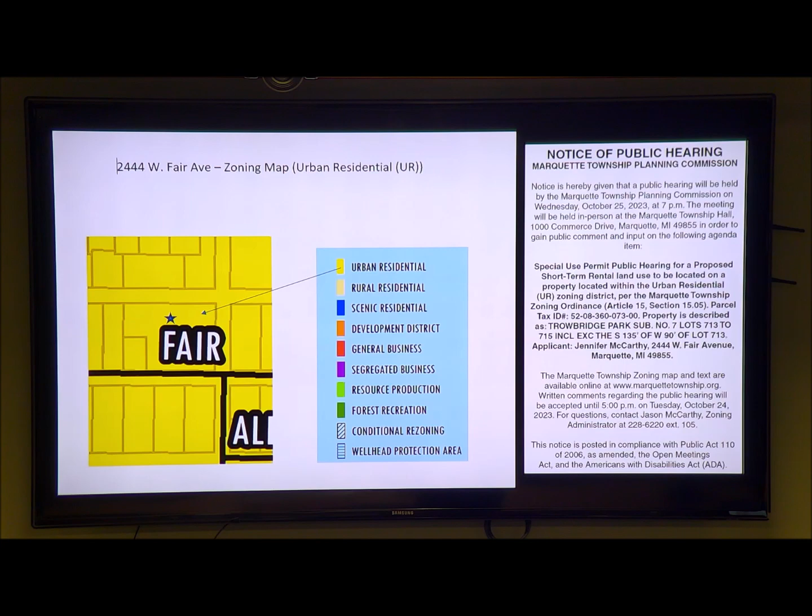And 11 in the area we're considering, is that correct? Well, that's within the entire - right, because some of these out on 550, obviously, we're not considering those. We're just considering the 11 that are in this general area, yes sir. And if you were to compare it to the city's requirements, you know, there's none on that block. Not that we have density requirements for them at this time. And there's only one other one on Fair Ave to the west.

No other questions? We'll open up the public hearing at 7:16. Anyone wishing to speak, please come forward. Seeing none, we'll close the public hearing at 7:17.

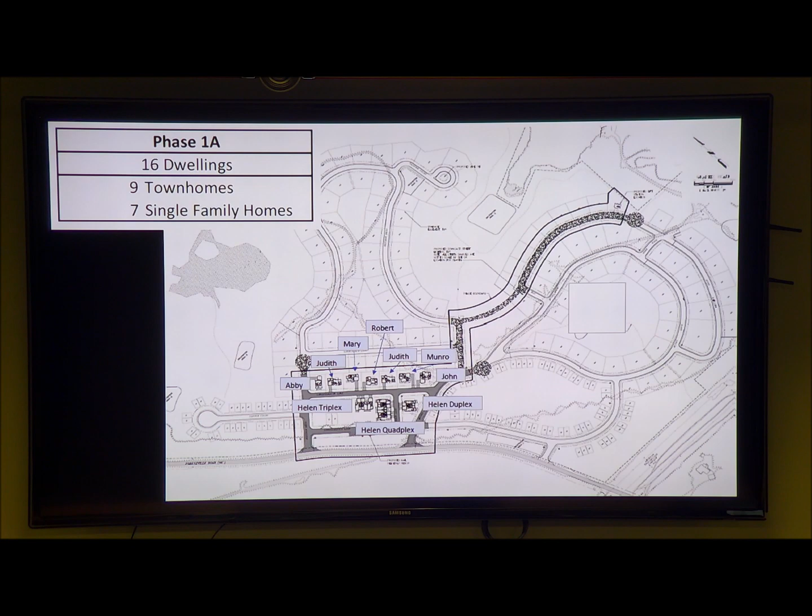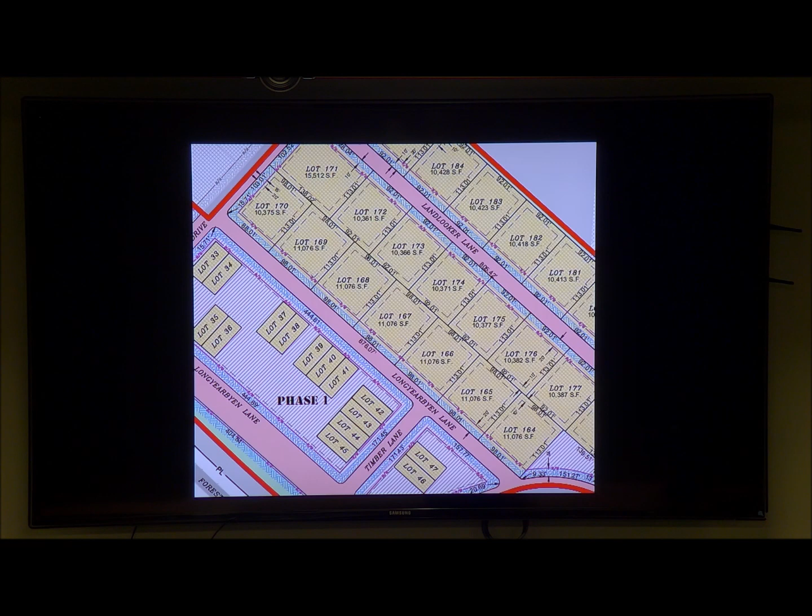So this is the area, if you planning commissioners look at their plan or their plan sheets, and you received quite a bit of information. I didn't include all the, I will say, boring stuff for you to consider—utility details, lift station design. I didn't include that. Those are required by state law to meet a certain standard, and I didn't feel it was pertinent to this discussion tonight. Tonight's more about height and bulk, zoning, traffic, etc. So this is the area that we're looking at.

This is the Abby site plan. Some of these lots that were initially shown to you in the preliminary actually got a little bit larger, and you can see they meet setback requirements for an urban zoning district.

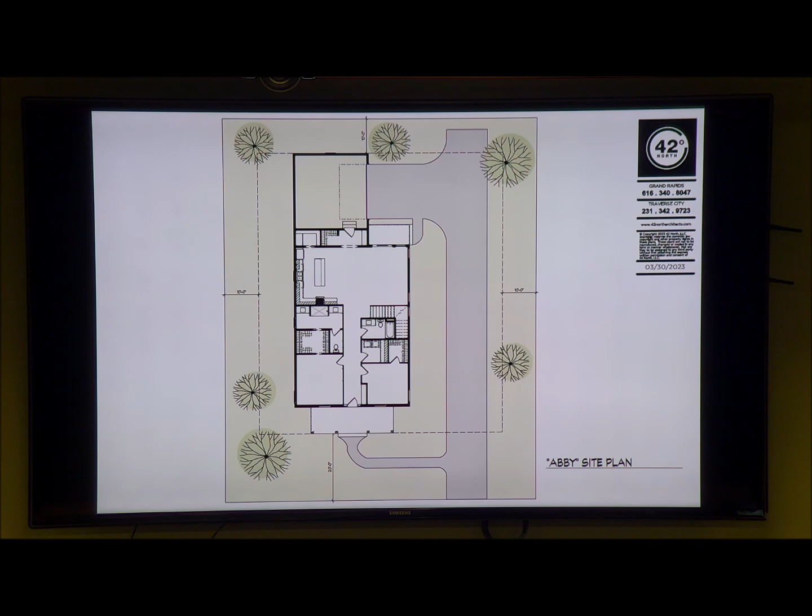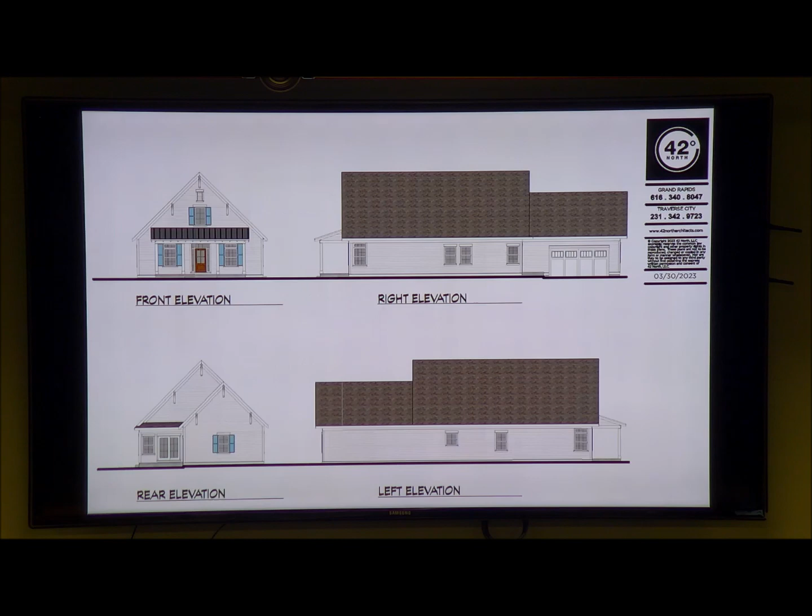Here's the floor plan and a quick elevation, so this is the style and quality being proposed. Is that the 1,500 square foot unit? No, that's about 1,600 to 1,700. It's our smallest single family home.

Would you like to talk about the next one? Sure, come up to the podium. Alyssa Arwood, Longyear. So the first one we saw was the Abby, our smallest single-family home. This one is the Helen, a duplex style.

This is 1,500 square feet on the first floor. Everything is single-story, but with optional basements where they apply and where you can build them. The Helen can be a duplex, a triplex, or a fourplex.

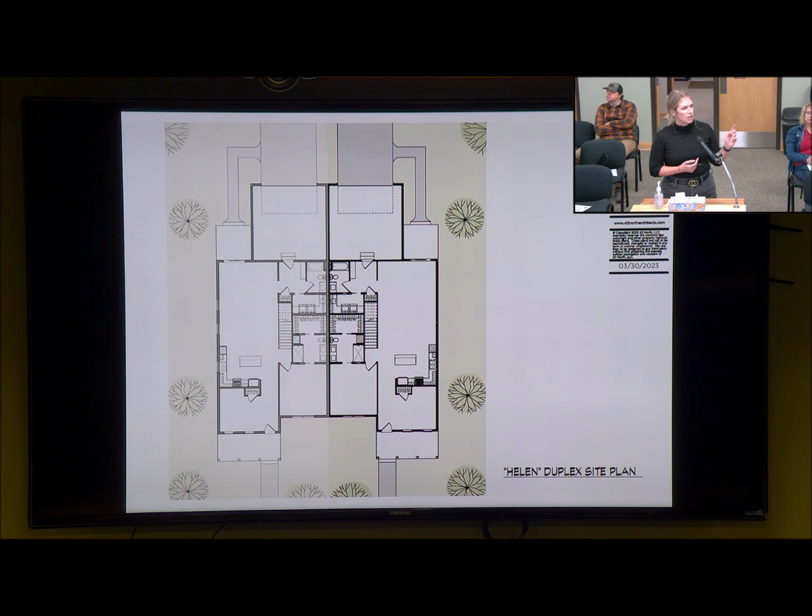There are alternate options too. Each of the home designs will have different things that people can do to customize them a bit. For this one, you could add on a second bedroom or leave it more open with just an office space or something like that.

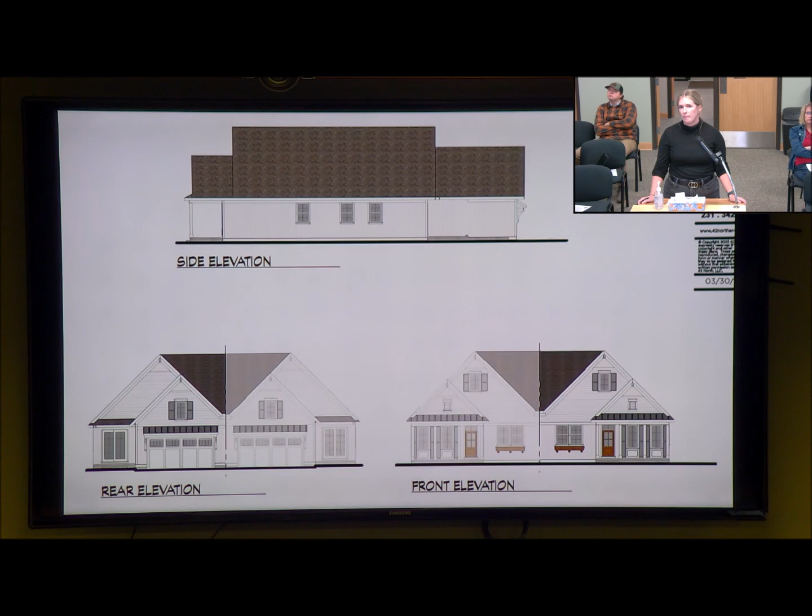And this is the duplex variety elevation.

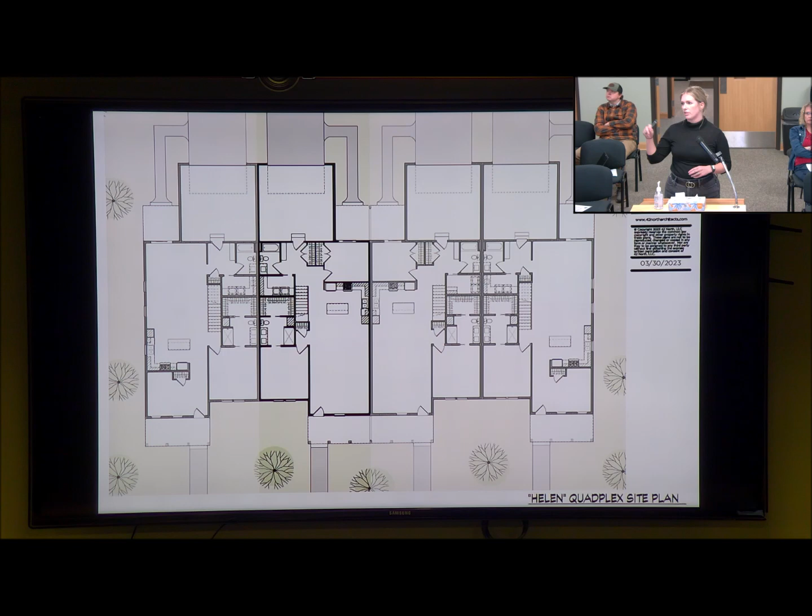And the Helen, again, is a quadplex, so they can butterfly one another. You've got all your garages on one side, and your formal entry where guests come in on the other side. So the side with the garages actually faces the street, so we tried to design them to be attractive on the backside too. They don't really change, you can do as many of them as you want, or butterfly them, but that's the elevation.

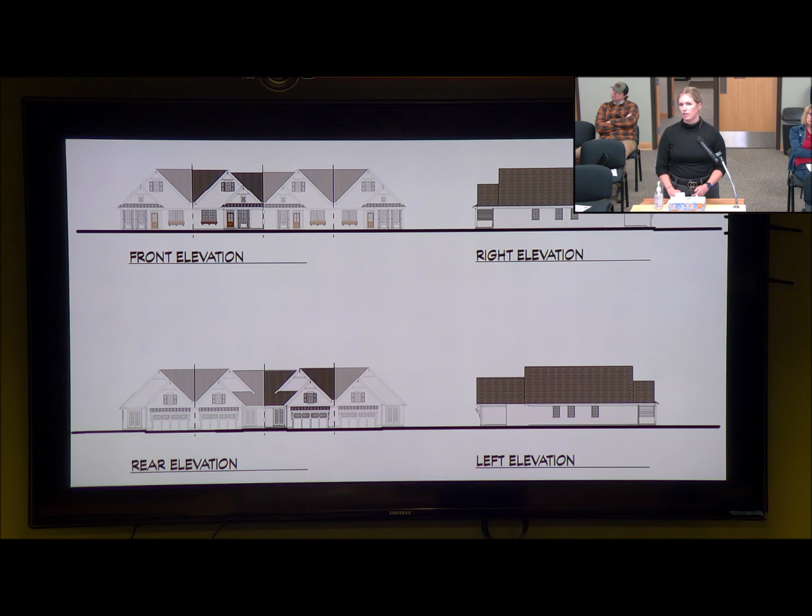These are all single-family homes moving from here. This is the John, and I apologize, I can't remember the square footages off the top of my head, but they go from about 1,700 square feet up to around 2,100 square feet for the biggest one. Again, you can do an office or change some things if you want to. They all have 2-car garages.

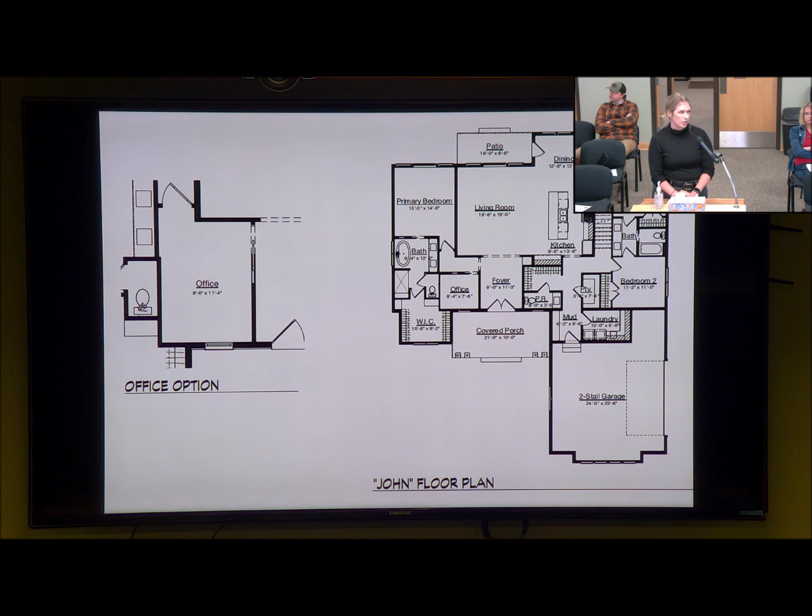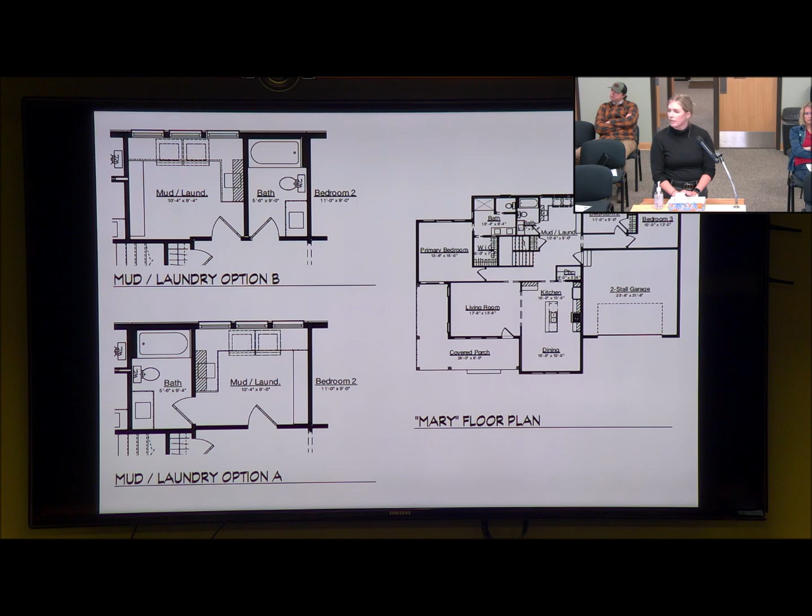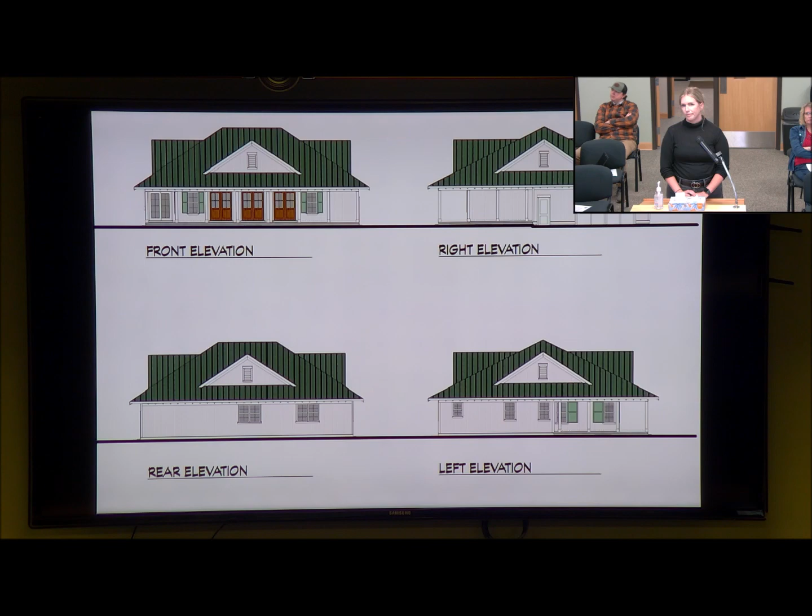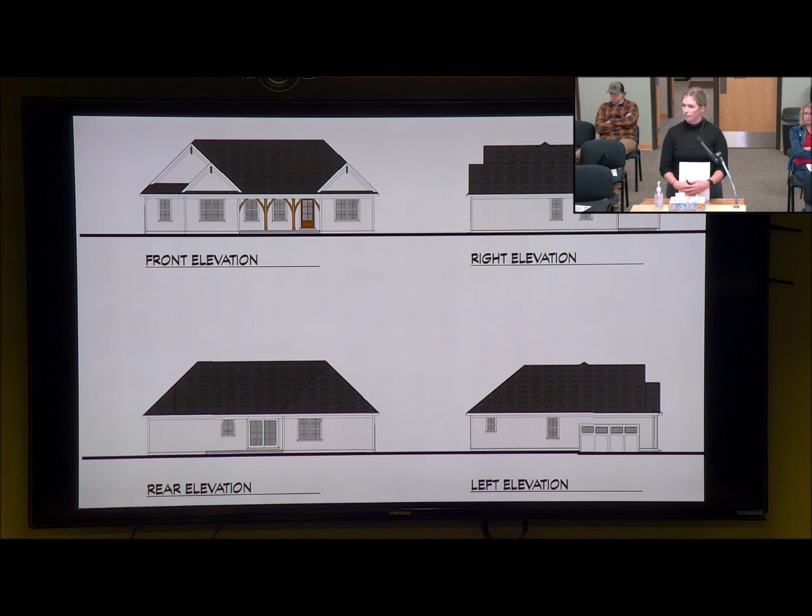And then the Judith, I think this is actually our largest one. So a variety, yep, and customizable. So you get a taste of the fit and finish style of what they're proposing to do here.

We're reviewing this evening because the only thing the Planning Commission gave approval for would be 16 dwelling units. These are your single-family homes, 1 through 7, and the first iterations we looked at were either a townhome, a quad, or a duplex, situated closer to Forestville Road.

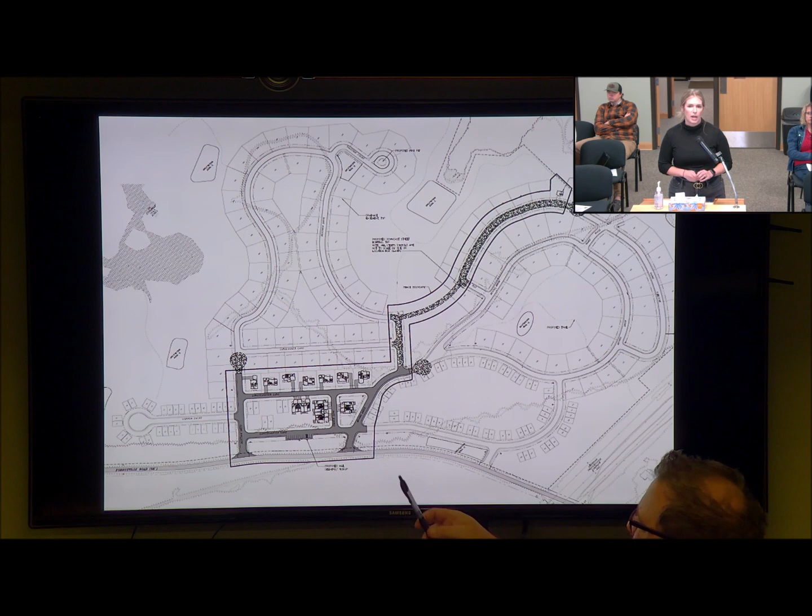These are the streets that would be created. Some, I guess, just guest parking, trail access parking, and trail access mailboxes. Okay, so out of the 240 some homes that were proposed, and what the Planning Commission initially commented on as far as the PUD they reviewed, we're looking at this right now.

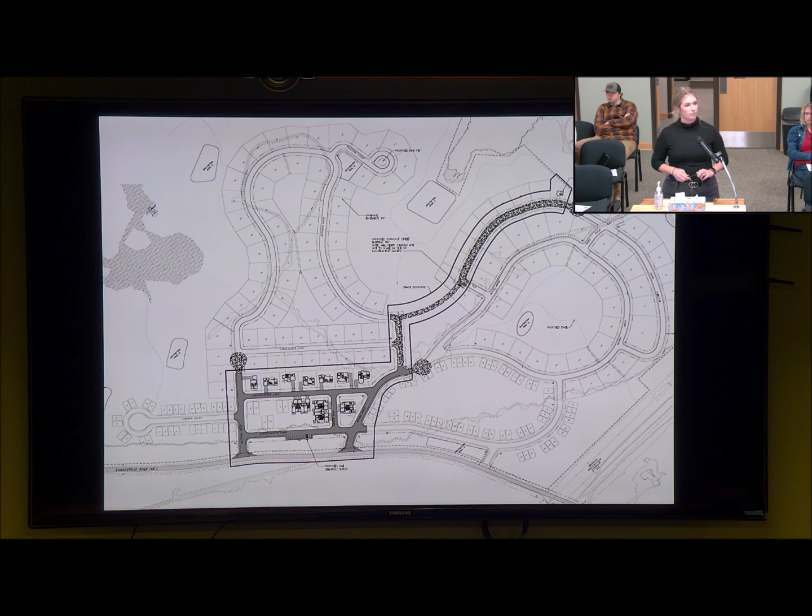Strictly that, yes sir. And that's all we're going to approve tonight is this. Well, you're contemplating it, whether you approve it or not, that's up to you. If it were to be approved, it is that and only that. Correct. And then to back up and talk about the road commission's correspondence to me and my reaching out to them...

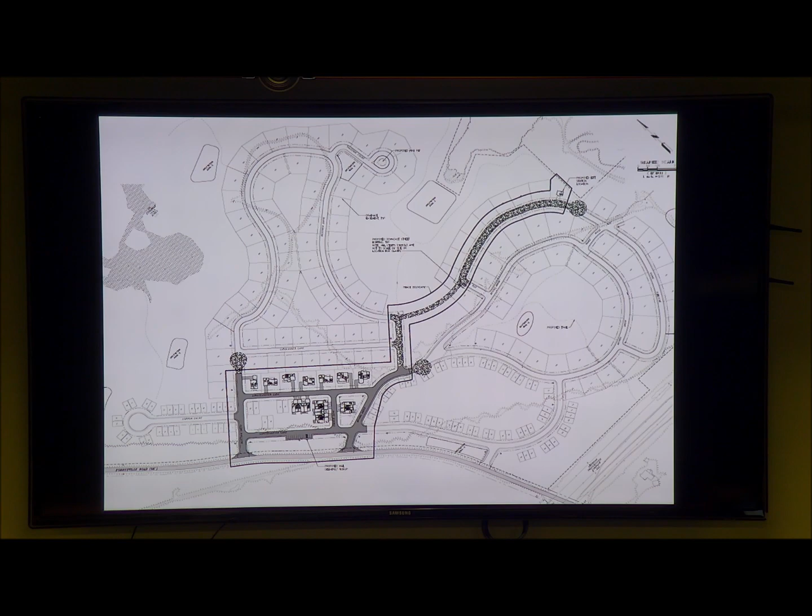We are not traffic engineers, we do not control the roads in the township. We rely on the road commission, their engineers, and their experts to provide us with any thresholds they see fit, among a number of things that Longyear needs to meet. The road commission correspondence referenced by the gentleman indicated that the intersection would not support the PUD as proposed. We are not approving what was initially proposed, which is 240 units.

This is scaled back significantly in an effort to allow some residential development to occur, but also to allow time for staff, the road commission, and our other partners to work on a permanent solution or alternative access to this development, prior to allowing it to reach what the initial PUD suggested. I think 100 units is going to take them 10 years to absorb, if not more.

Interest rates are high. There's a number of factors that are involved that we contemplate. However, the Planning Commission approved Phase 1A. That's what this is tonight. That's the only thing that they're looking at.

Each phase, as the ordinance addresses, every time Longyear wants to add additional structures or dwellings, they have to come back before the planning commission. That means you guys have the opportunity to come and speak again, or to see what kind of progress the township has made with the road commission and their requirements to address the intersection, since they own the roads. So I'll just say that.

Moving on, this is the utility layout that's proposed. This is within the site. We'll get to the required road information, or the utilities along the road too. But this just shows, and it's kind of hard to see on here honestly, but that's why I gave you guys large sets of plans to review. Basically water and sewer. The area will be served by water and sewer, which should create some redundancy for other residents in the area.

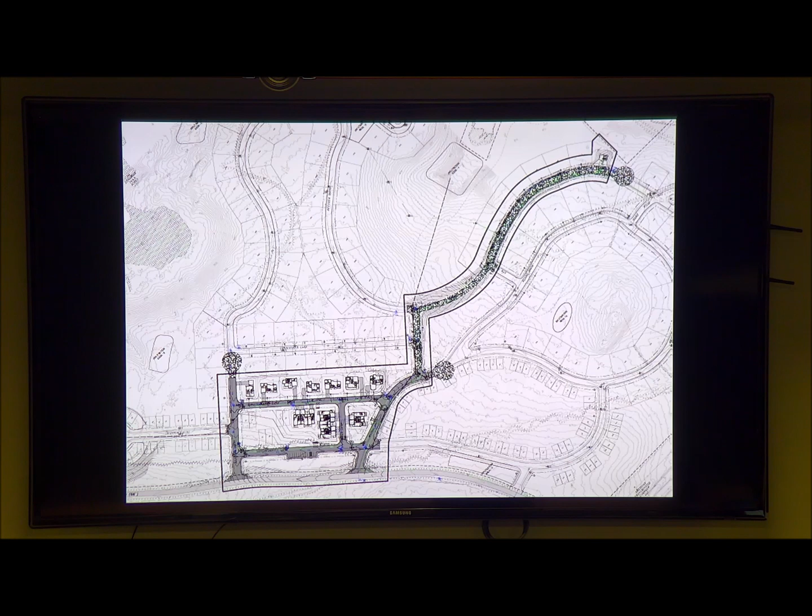I just added this, so here's the Forestville intersection here. The development's further downstream, but essentially the water main ends at Huron Woods Drive and terminates probably a manhole past, which is typically by ordinance, so it stops there. They will continue that 8-inch water main as it is up to the development, and then they will introduce a 6-inch sanitary force main to the development.

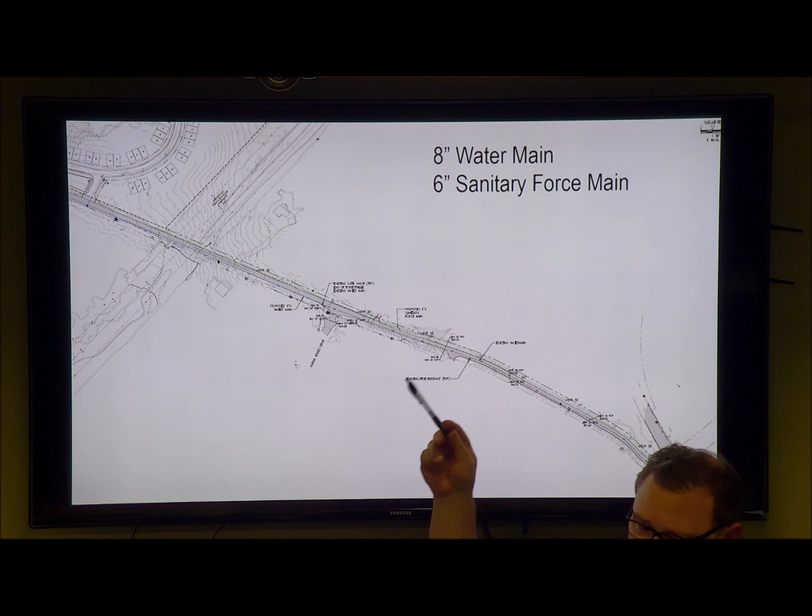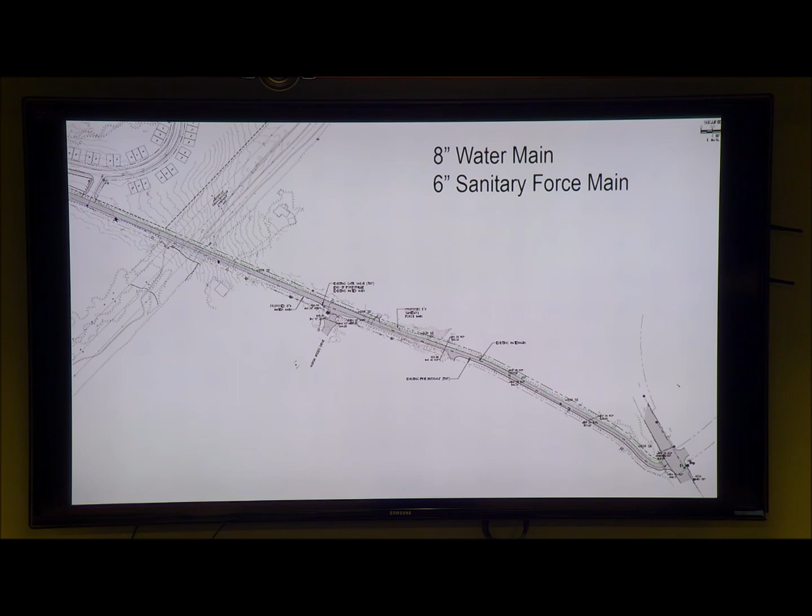That'll all be coordinated through the Public Works Department, and they have preliminarily reviewed the plans. I know you've been in discussion with Superintendent Bodanis and the crew.

So this is just a zoomed in version of what's being considered tonight. You've got your 7 single families and then the smaller. I guess I want to note the variety of housing types that are being offered.

As we've talked about recently from a zoning perspective, about accessory dwelling units, about introducing potentially duplexes into the Trowbridge Park area, having some of those areas that may not work for development of a single family home, in an area on an undeveloped right of way. But if you had different housing types, it might make it more financially feasible to allow that type of development.

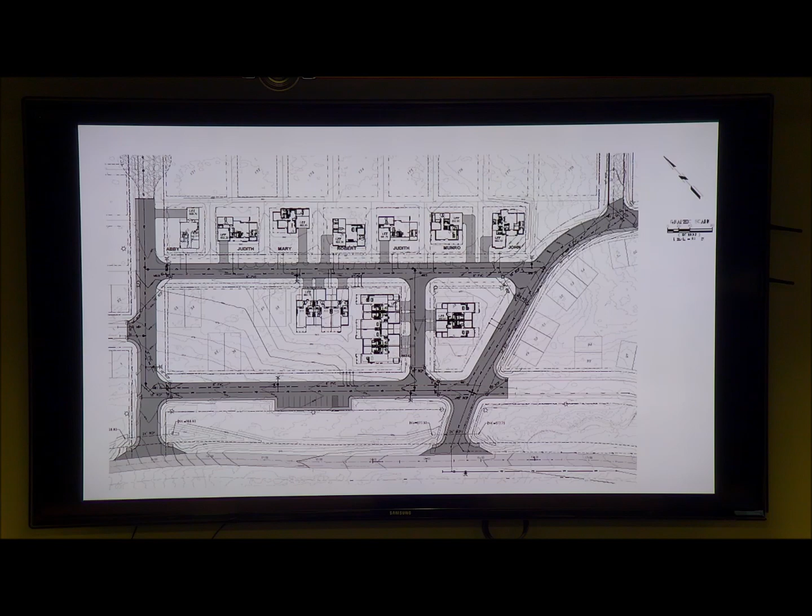So from planning principles are changing, especially with the housing crisis. Eric and I just got back from the Michigan Planning Conference. There were 520-something planners there, and not to get too far off course, but to the point, housing is a major issue, and density is something that should be considered, but the term that should be utilized more is proximity.

Proximity to education, proximity to healthcare, proximity to recreational opportunities, and the like. Density is becoming less important from a planner's perspective. Proximity to amenities is more important. That was a key takeaway.

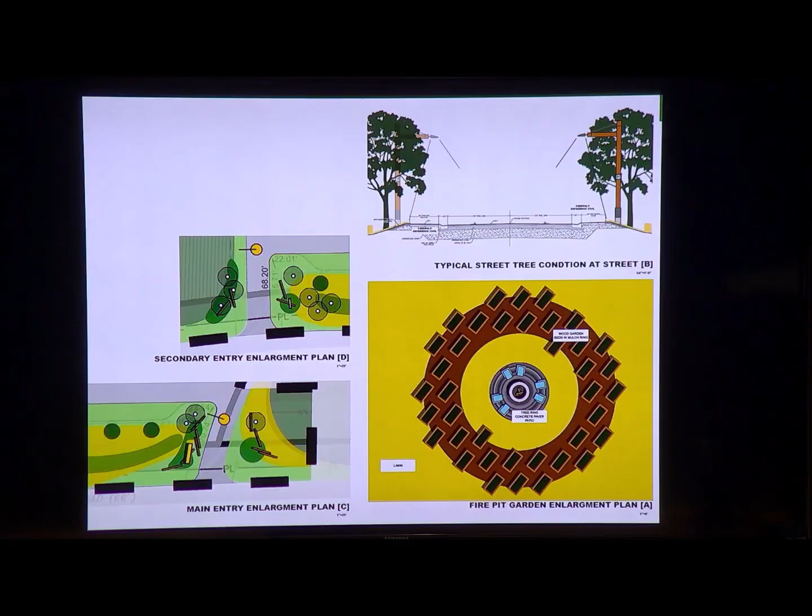And entry signs and other signage throughout the site. Just showing some basic cross sections with improvements in landscaping. And then these all appear to be native plants to the area.

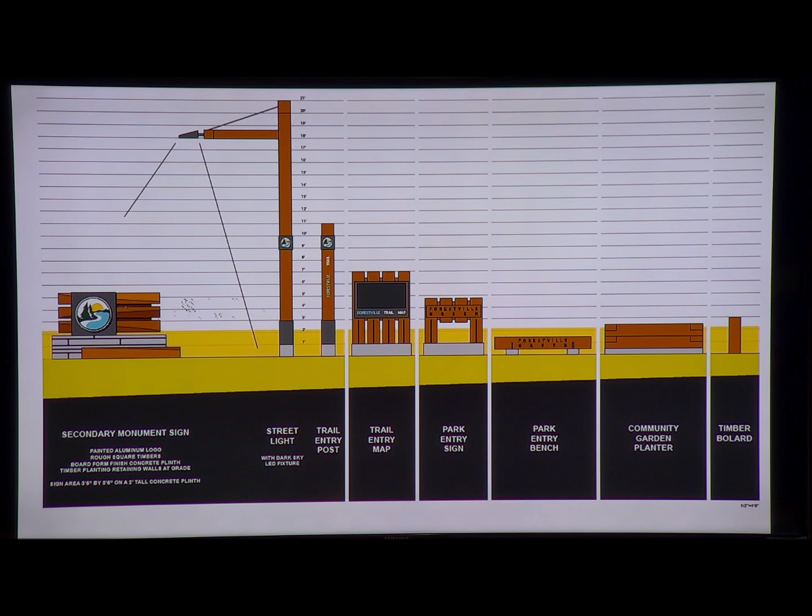Low slung monument signs, so not the typical stuff you'd see along the corridor. And some different type of signage throughout the site, which appears to be in alignment with our sign ordinance. Lighting standards.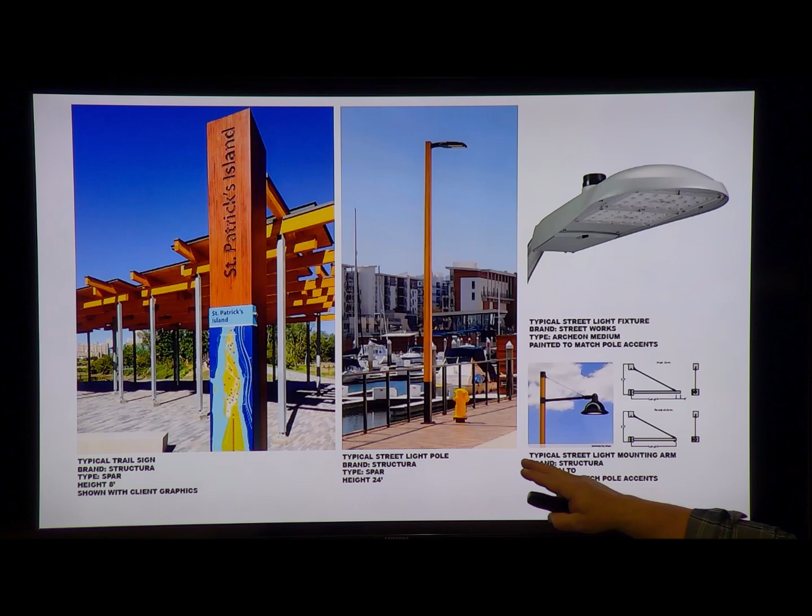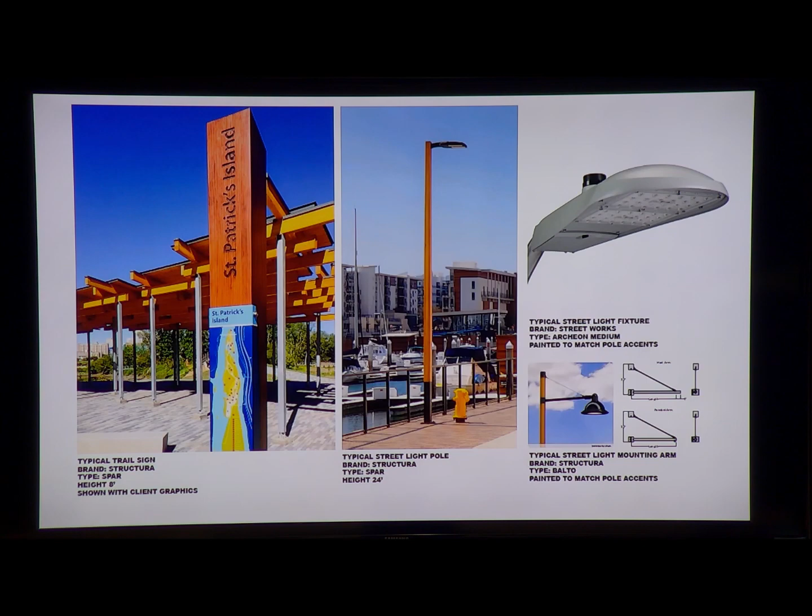So the Planning Commission's had this information since our last meeting. They've had plenty of time to review it. If you look through the PUD language...

The Planning Commission is charged with addressing the following items. I won't read through it all, but they basically need to determine whether there's compliance with section 1302, which are the qualifying conditions, and 1307, which is the standards for approval. So the standards for approval, they have to contemplate individually each of the following. A, the proposed PUD complies with all the qualifying conditions of section 1302.

B, the proposed PUD is compatible with individual land uses or surrounding uses of land, so residential, the natural environment, and the capacities of public services and facilities affected by the development. C, the proposed uses within the PUD will not possess conditions or effects that would be injurious to the public health, safety, and welfare of the community.

Item D, the proposed project is consistent with the purpose and intent of the PUD as described in section 1301 and represents an opportunity for improved or innovative development for the community that could not be achieved through conventional zoning. And E, the proposed PUD meets all the site plan requirements of this article and the provisions of Article 18, Site Plan Review, Article 1807, respective of being either a preliminary or final PUD request.